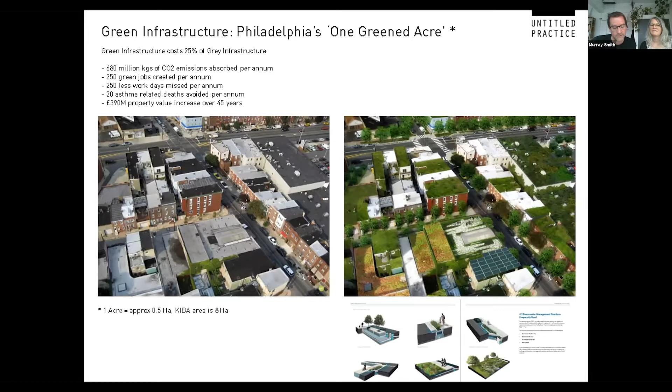Green infrastructure is the use of soft landscape in the urban environment, which helps address the effects of climate change. One Greened Acre is a clear example from Philadelphia, but other cities and boroughs across London are also implementing ambitious green infrastructure strategies. We often refer to GI's triple bottom line to highlight its benefits, not just environmentally, but economically and socially. It's about making our cities more livable and resilient for the future.

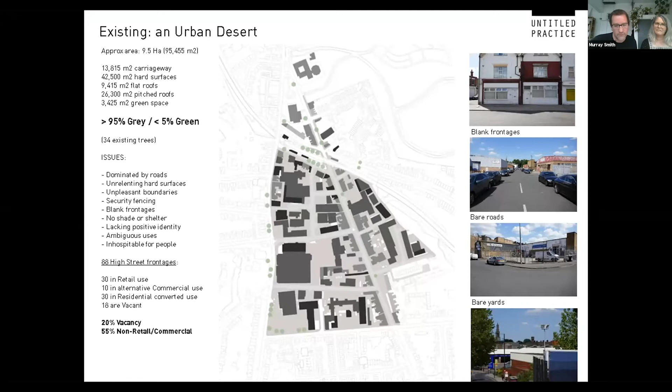But what do we find across Norwood's High Street and business area at the moment? It's a bare and inhospitable environment. We estimate it's more than 95% grey and less than 5% green. The High Street has a vacancy rate of over 20%, with 55% of frontages no longer commercial. These are really challenging figures.

However, the area has great capacity for change and could be totally different. The huge site area of 10 hectares offers enormous resource potential, with extensive underutilised ground and roof areas which could be transformed by reducing grey and increasing green to achieve a better balance, by greening streets, yards and roofs.

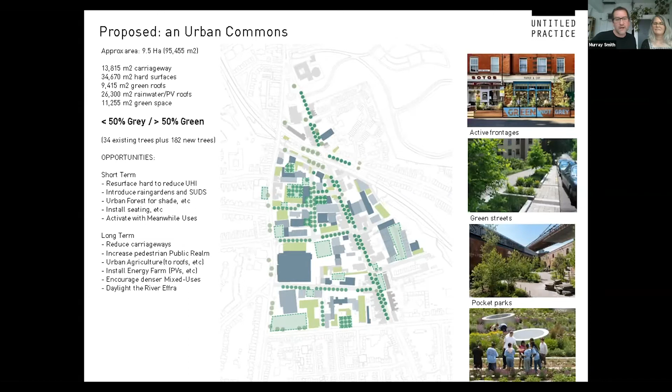We think the future is in the more joined up use and reuse of resources in our cities. The green and circular economy offers great examples of community projects like The Plant in Chicago and Global Generation here in London at King's Cross and Canada Water. These organisations work with school children and the community to deliver green and other life skills in collaboration with local businesses.

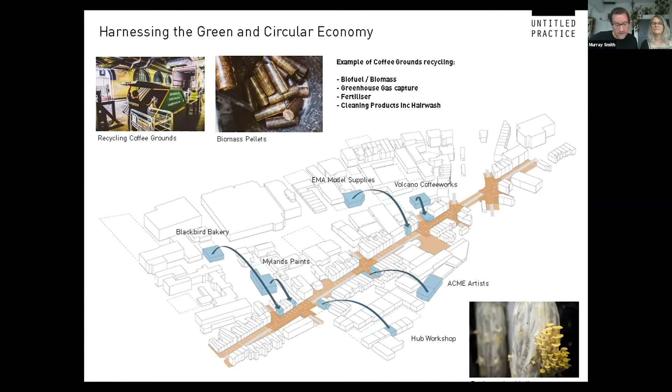Lambeth Council has declared a climate emergency, one of the first in London to do so, committing to be carbon neutral by 2030. There's no time to waste. Key policy targets across their green infrastructure strategy, biodiversity action plan and local plan, supported by the Mayor's Healthy Streets, could be addressed through West Norwood.

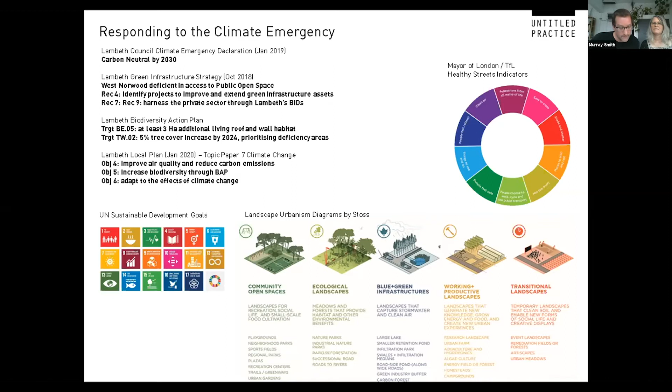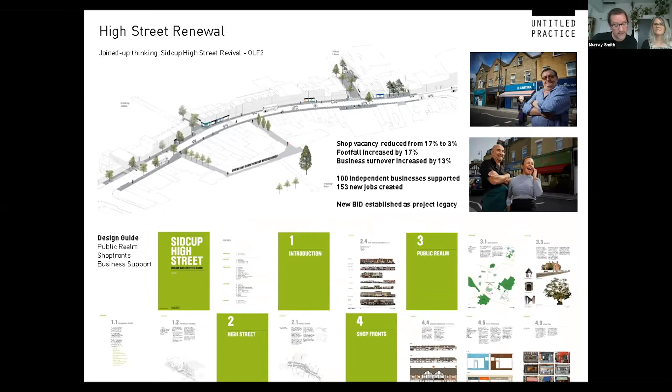We know that joined up approaches can work from our High Street renewal work at Sidcup. We worked on a design and identity guide, delivered public realm and shopfront improvements alongside an extensive business support and development programme, which reduced vacancies from 17% to 3% and increased footfall and business turnovers.

We're also delivering environmental improvements through the business improvement districts at Borough High Street, including this living wall, which is supplied by rainwater from the building roof. And we're working at Rainham at the strategic industrial land as well.

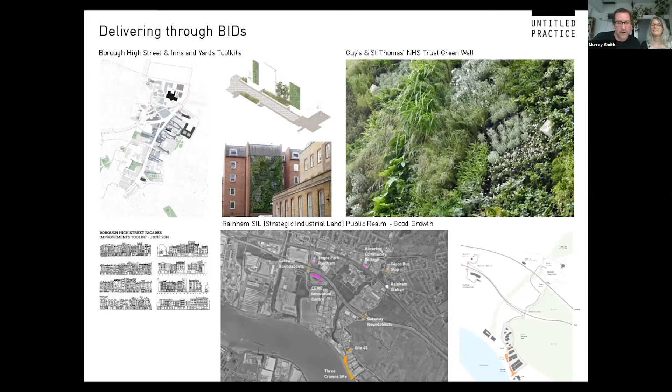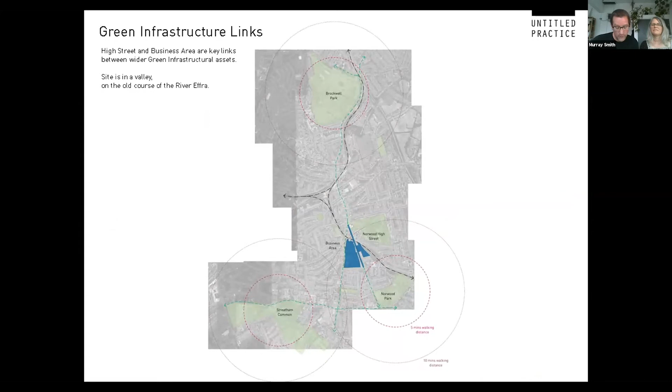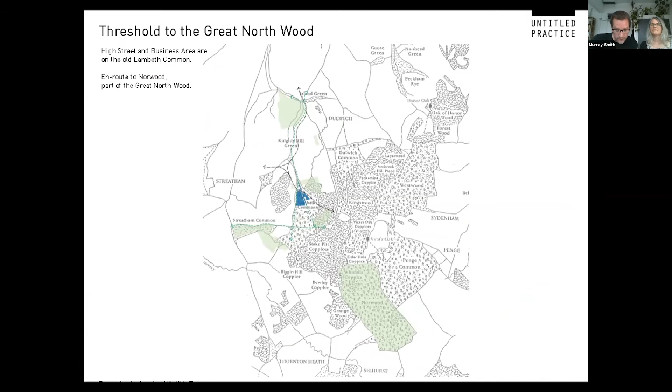So we see Norwood High Street in a green infrastructure context as part of a network of interconnected public realm and green spaces through the valley of the Old River Effra, from Norwood Park down towards Brockwell Park. The site was also formerly Lambeth Common, part of the Great North Wood, en route to Norwood to the south.

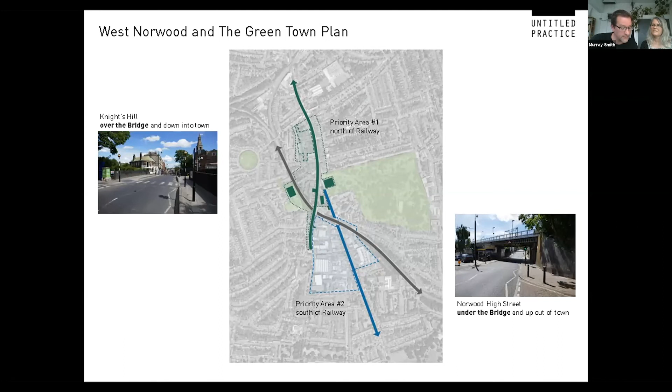Closer into West Norwood itself and the Green Town Plan priority areas, we see the railway and also the one-way road system, the grey infrastructure, as affecting the experience of the area. Whereas Knight's Hill flows effortlessly over the railway into Norwood Road, the High Street is more severed from the rest of West Norwood, accessed through the railway bridge at Auckland Hill.

This seems like an obvious place on the High Street to mark the approach to the business area, and an opportunity to define a distinctive identity for both across their shared public realm.

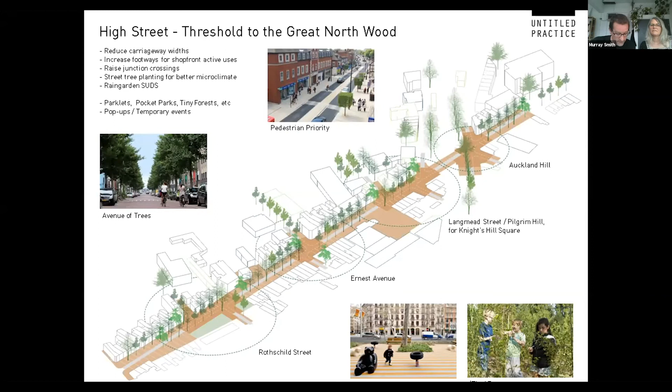We see the High Street as a threshold to the Great North Wood. The High Street could be transformed with a strategy framed by green infrastructure, reduced road widths, increased pedestrian priority at junctions, and widened footways, made hospitable for people, with increased street trees, pocket parks, parklets, and sustainable drainage solutions.

Activation can happen in a wide number of ways, from short-term, meanwhile uses to test the opportunities, through to longer-term, more integrated change, finding ways to make the city more livable.

And this approach can be extended out across the wider business area, where all buildings and spaces through their current underdevelopment represent unrealized potential and opportunity.

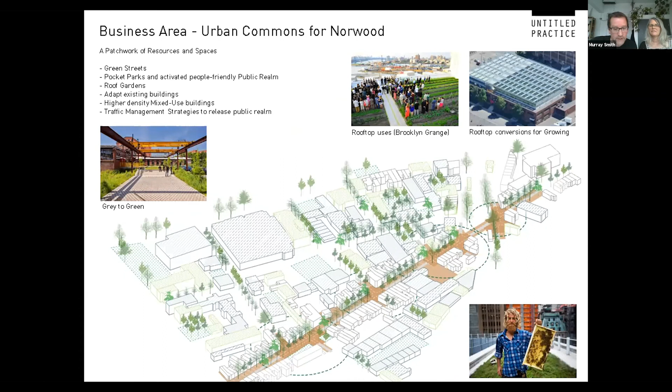There are lots of precedents for the adaptive reuse of industrial business areas responding to climate change imperatives, with depaving of impermeable hard surfaces making space for more environmental and soft improvements.

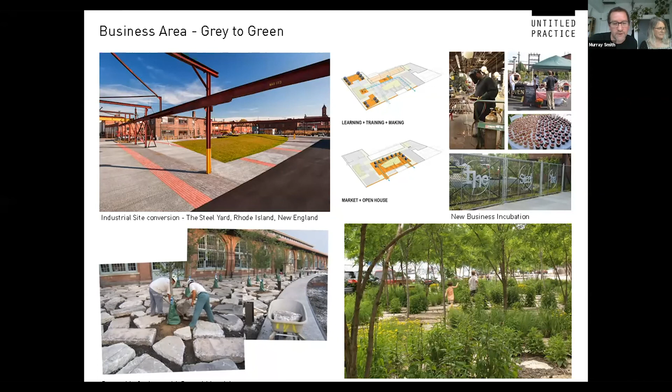And these environments, supported by the right enabling planning policies, can encourage and attract diverse new businesses and uses. Here are examples of reappropriated industrial sheds and yards, as well as new mixed-use building typologies.

So to finish, we think the power of Norwood High Street lies in its unique and extraordinary potential to become somewhere truly distinctive, not just in Lambeth, but also in London, a joined up green and circular community, resilient to meet the changes and challenges of the future.